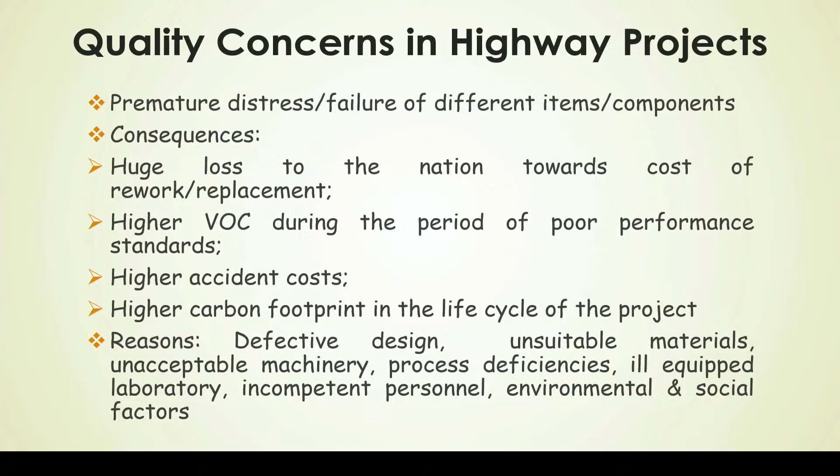So I will delve into how this quality control came into being. First of all, it started with industrial production, then it transferred to all aspects of engineering, including civil engineering.

Before the second decade of the 20th century, quality control meant inspection of products and removal of defective ones. That was the basis. Then the first statistical process control was started by Dr. Shewhart in 1924.

His theory was based on two parameters: assignable cause and chance cause variation. Something you know but are still not doing about, that's assignable cause. If you are not removing those assignable causes, you can never have good quality. Chance cause variations will always remain in spite of your best efforts. He then developed different statistical tools to minimize those chance cause variations.

Next came the concept of total quality management by William Edwards Deming. In post-war Japan, he was a respected personality in the industry. He proved that it is improved quality that brings good returns to all those involved in the process, starting from the customer, manufacturers, its vendors, suppliers. Everybody benefits from good quality.

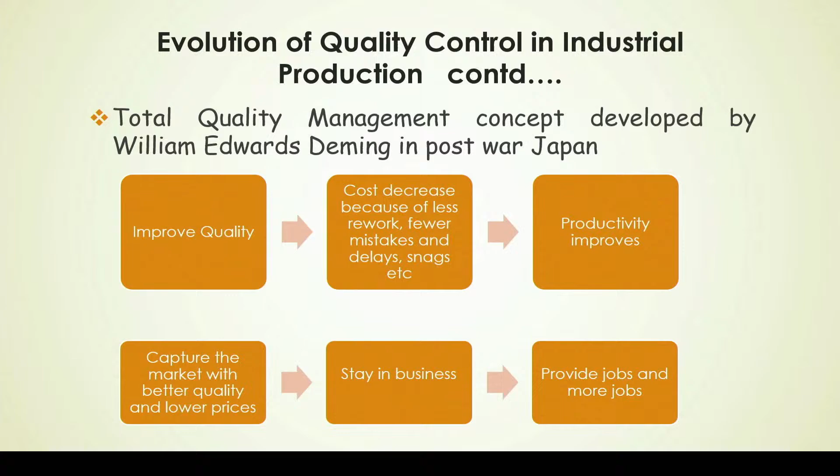It is a very misconceived, rather wicked notion that if you do poor quality work, you save money and get profited. It is the other way around. Good quality brings good returns to all, but in the long term, not immediately.

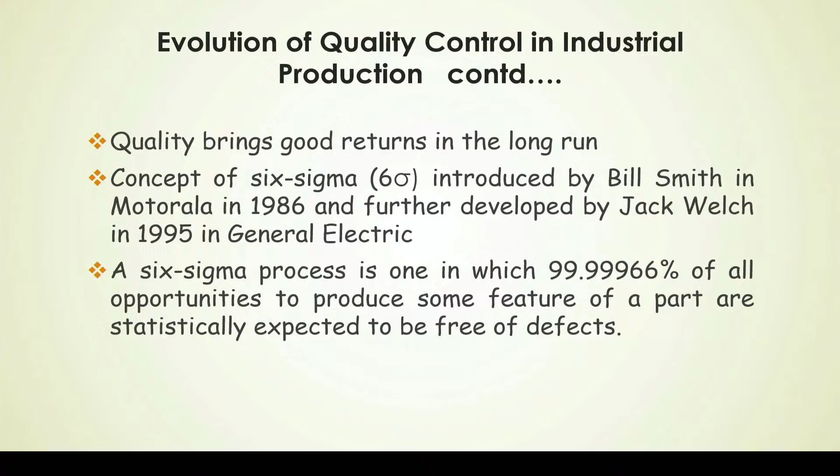Then came the concept of Six Sigma, which is the top of all, and we know that if there is 1 million products of something, only 3.4 are permitted to be defective, not more than that. So these are the benchmarks of quality, and we must see where we stand.

During my interaction with many people, even those in the business of quality control at site, I find they lack fundamental understanding of quality related terms. What does quality assurance mean? What does quality control mean? Many of us always confuse between the two.

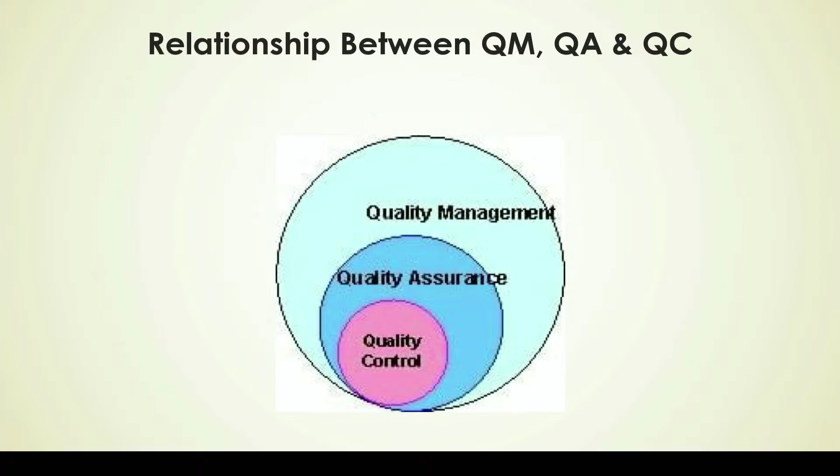So these are the fundamental definitions from ISO 8402, which gives the terminology for all quality related terms. Quality assurance and quality control are fundamentally different. In fact, quality control is a subset of quality assurance, which includes all your planning and actual implementation. If you can see this diagram, this shows how quality management, quality assurance, and quality control stand in relation to each other.

Then there are quality characteristics. Basically all the material, layer, or component we use each have several quality characteristics, like liquid limit or PI value. These quality characteristics define the performance based on functionality, reliability, usability, efficiency, maintainability, and portability. Based on these parameters, the quality characteristics are decided, and the values assigned to them are specification limits.

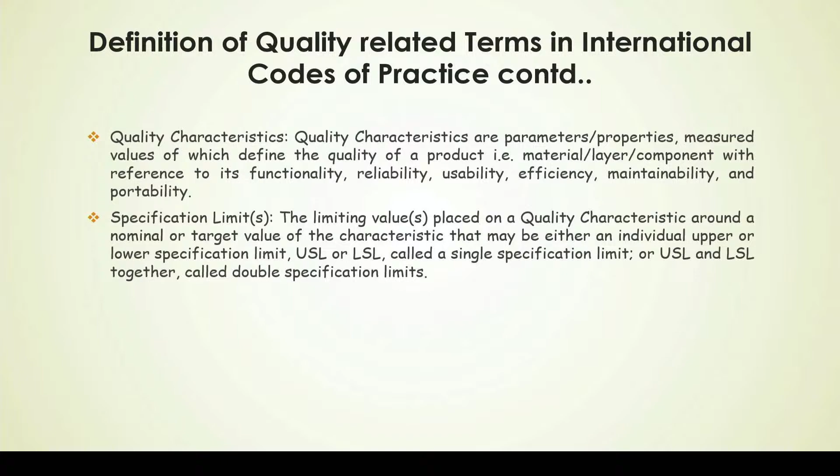So if I say I require 98% modified Proctor density, that is a specification limit for the field density quality characteristic. I think many times our field engineers lack understanding of these terms, so how can they use them properly.

Now I have a long presentation, I will not go into details. These are as per our IRC SP 112, which is the manual for quality assurance and quality control in road and bridge works. We basically have three stages.

We first have to plan things under assurance, then control it, and based on the test results, we have to either accept it or reject it.

I will not go into detail, but for having good quality, we require good and competent personnel. We have to have a quality assurance plan prepared in advance. This is a requirement of all EPC, BOT, and HAM projects. Within 90 days of the appointed date, the quality assurance plan is required to be prepared by the contractor and approved by the authority engineer or independent engineer.

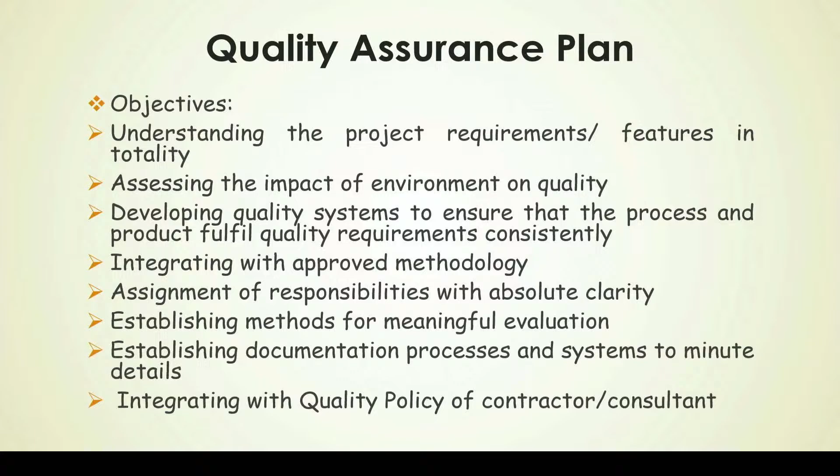But what we often see is that the quality assurance plan of project X is proposed for project Y, even sometimes the name and place are not replaced. That's the amount of importance we give to the quality assurance plan and its content.

I will not go into details again, but there are certain things our site laboratory is not equipped to test, like factory manufactured materials and products. How do we approve them? In IRC SP 112, we had an elaborate discussion on this, based on manufacturer's certificates, manufacturer's testing reports covering raw materials to finished products, coupled with witnessing in the manufacturer's laboratory, and if necessary, third party testing.

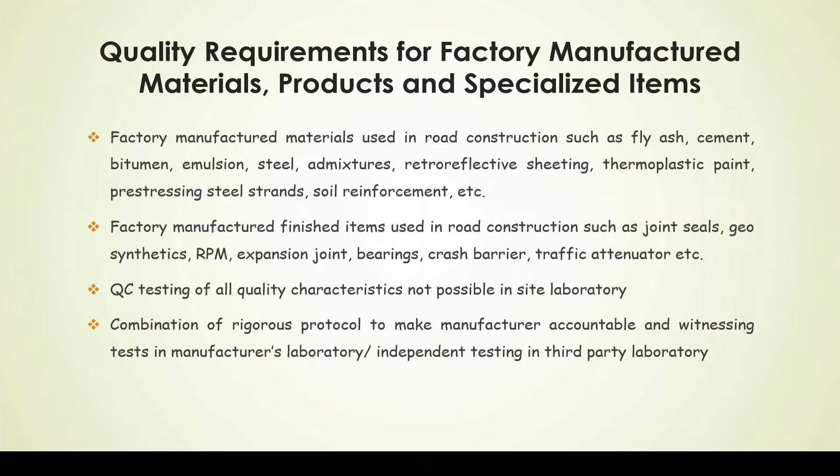So this is about laboratory and on-site testing and measurement. We all know it, but it depends. If there is a problem, then there is a laxity or closing our eyes for some of the things that I have mentioned here.

Then documentation and communication, this is also a very important part. There should be traceability. If an embankment has 10 layers, in the fifth layer, where from I have used the material, from which borrow area, and what was the property of soil from that borrow area - that should be available at any point of time.

We many times see field density determination with respect to MDD of certain soil which has not been used in the first place. So the entire testing is very ridiculous. It has no sense, but people do that.

Then come to statistical analysis, because statistical analysis is important. Why? We are not testing the population or the lot, we are testing the sample. Based on the sample testing, we are predicting performance of the lot. And for that matter, statistical analysis is very important.

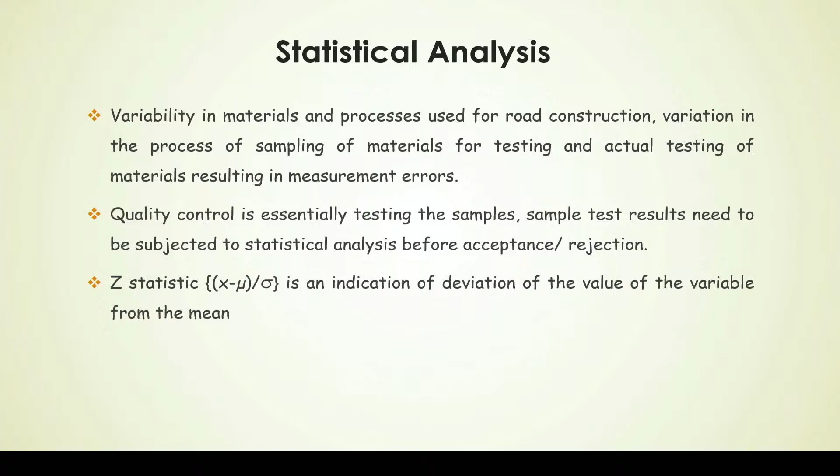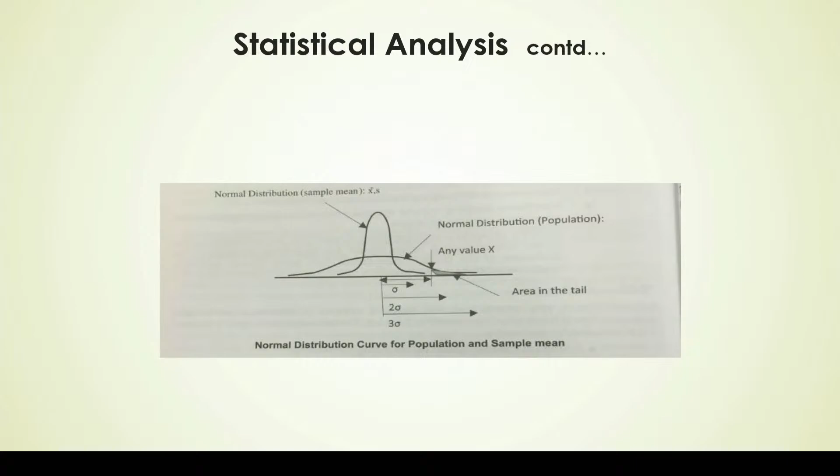This is a normal distribution curve showing the standard deviation for the sample and the population. This is the method, I'm not going into this. Again, I'll just come with a table. I think in our orange book, these are the items and the quality characteristics for which statistical analysis is mandated.

One should not approve a section based on the mean value only. Standard deviation has to be determined, and after applying the equation, then one should take the decision. But it is often ignored.

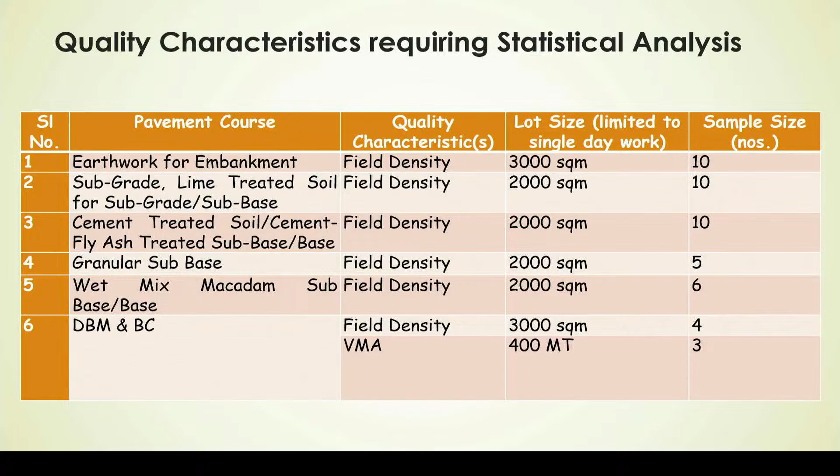And this is the final thing - how to accept, how to issue a non-conformance report. After non-conformance, it is not always to be rejected; opportunity should be given, and there are always ways and means of rectification. But is it happening with an approved methodology, and after rectification, are the test results satisfying? That's the important thing. So these are many lapses noticed in our highway projects.

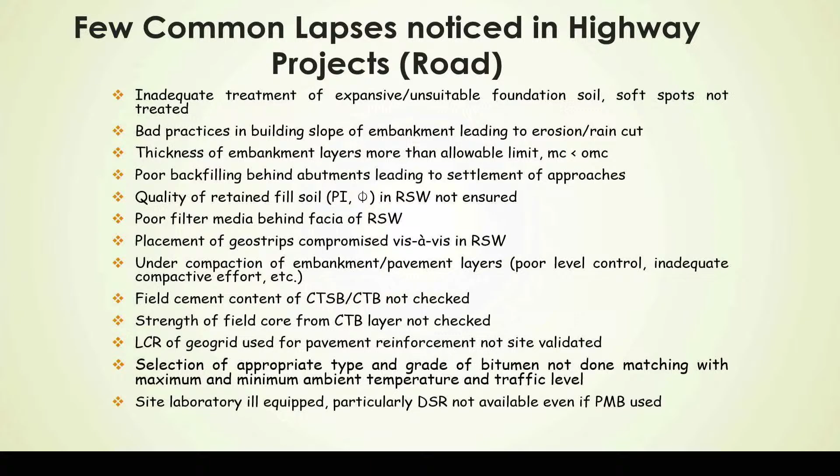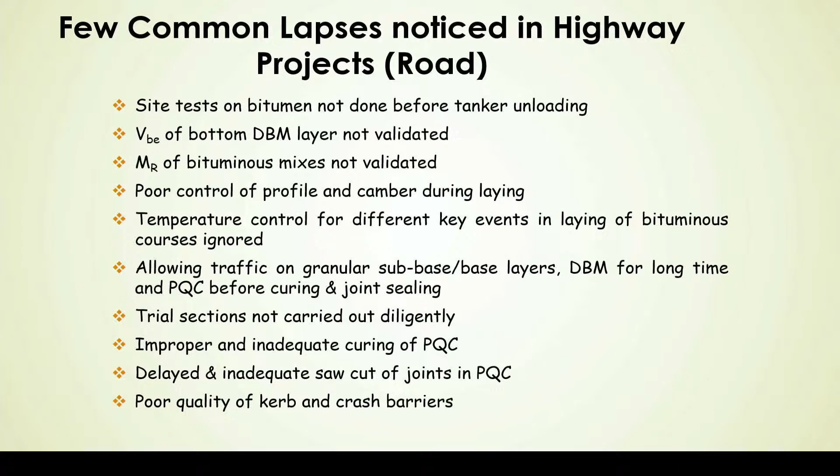Again, I will not be reading all of them. They are not only in pavement, they are in bridges, they are in tunnels. In many things we are noticing issues, in rigid pavement, under construction bridges. There are some glaring examples of how the lack of quality is affecting us.

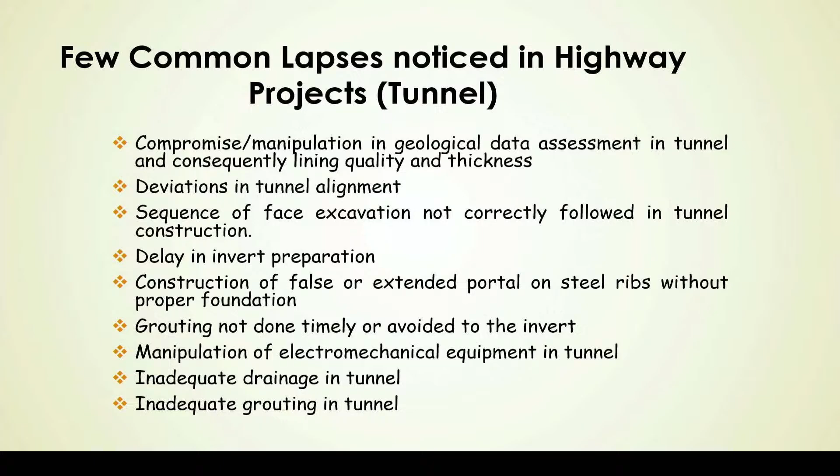Even for tunnels, manipulation of the geological data is one of the fundamental reasons. If it is a certain rock class, it is reported as something else, and that leads to some saving in the cost of lining or something, but affects the performance, the durability, and also sometimes results in under-construction failures.

So why are these lapses occurring? Because you don't have the requisite personnel. Then we are not insisting on deployment of qualified personnel from the manufacturer or expert service provider for operations like pre-stressing, expansion joint fixing, geosynthetics application, where the contractor's personnel are not capable or qualified for this. But just to save cost, they don't allow the manufacturers, or the manufacturer does not insist upon that.

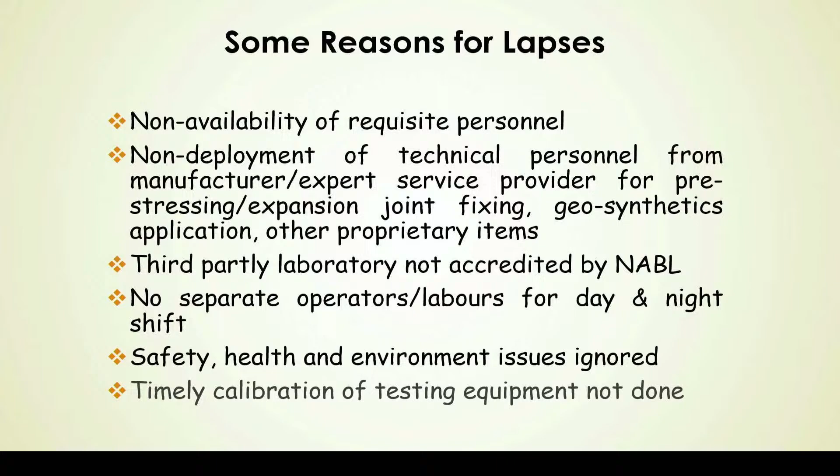Then third party laboratory not accredited by NABL, no separate operators for day and night - same person allowed to work continuously for 2 shifts - that will definitely affect quality. The safety, health, and environment issues always impact quality if we ignore this in a variety of ways. And then calibration of testing equipment not done timely.

So now these are my points for the panelists. We have seen that we have enough tools in our contracts to punish the contractor for wrong work. Probably we are failing somewhere. So can we have some ecosystem to incentivize the contractor for good quality? It is a thought I am bringing, and our panelists will give some insight into this.

Then capacity building of all stakeholders - I should say integrity is a lesser culprit than incompetency. So how to improve that? One should know what he is doing and what are its repercussions. Stricter enforcement, of course, but how to do it? The contracting mode, longer DLP - what should we have - then due consideration for safety, health, environment, and community engagement.

So I would request panelists to dwell upon these issues. We have a total time limit of 1.5 hours, so I would request individual panelists to please restrict their presentation or views to a maximum of 7 to 8 minutes. So I would first request Shri VK Rajawat ji, Member Technical NHAI, to please give his views.

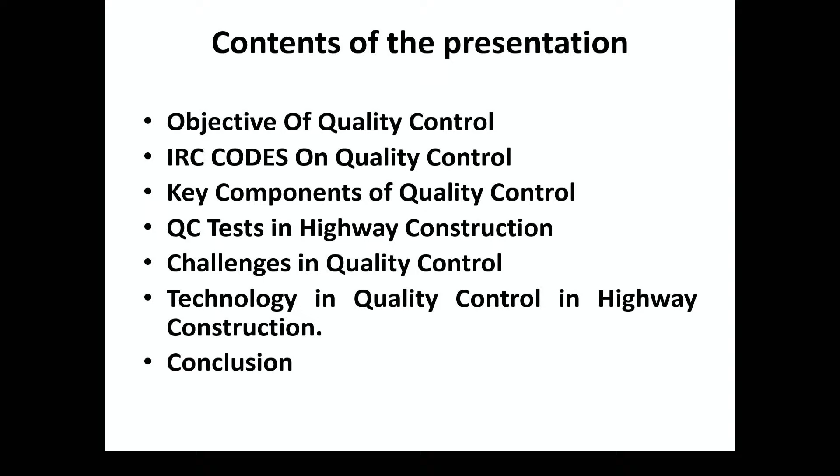As we all know, I think the context has already been set. Chairman has deliberated on all the aspects of quality in his introductory presentation. So it is basically to ensure that the highway construction meets the specified standards and performs as expected. That is the basic purpose. It is crucial for durability, safety, and cost effectiveness, as well as public satisfaction - to ensure the safety and longevity of the highway. We also have to reduce the repair cost and maintenance frequency, and enhance public confidence and road user satisfaction. That is the main objective of this.

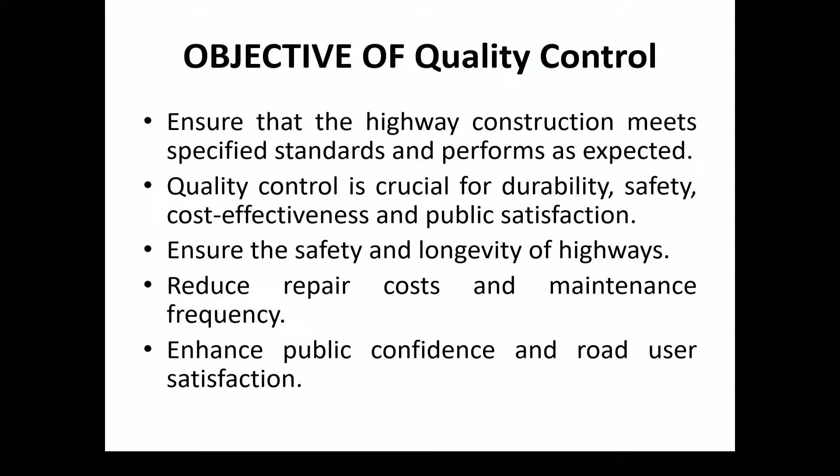At present, initially the only document available to the profession was IRC 11, and it was like a Bible for all of us - a 1984 publication, in use till 2017, for at least 33 years. This was the Bible for all quality control issues, the handbook of quality control for construction of roads and runways. Another important document is on quality system for roads, that is IRC 57, and another for bridges is IRC 47. So these were the three documents available to the profession.

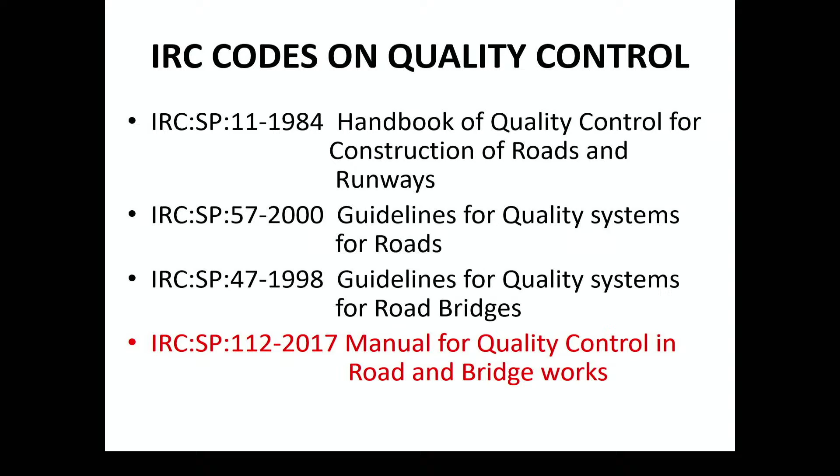Then around 2015, IRC decided that we should merge all three documents and have a single document, the manual for quality control in roads and bridges. So it will cover all the aspects - management of quality, quality assurance and quality control, all three issues. So this is the only document available now. All three documents have been withdrawn.

As we know, the key components of quality are material testing and verification, the most important component, including testing of soil, aggregate, bitumen, to ensure compliance with the specifications given in the manual.

Construction processes involve quality issues like proper compaction, asphalt laying, curing, every aspect. Equipment calibration is another aspect of quality, ensuring it is calibrated and functioning correctly.

Inspection and monitoring is also one of the components of quality. And documentation and reporting, keeping track of all the activities, accountability fixing and future references.

Various tests, very briefly: for soil and aggregate testing we have sieve analysis, Proctor compaction, Atterberg limit. For asphalt testing we have Marshall mix design, density and compaction. Concrete testing has slump test, compression test, and material sampling, which is random and scheduled sampling of materials.

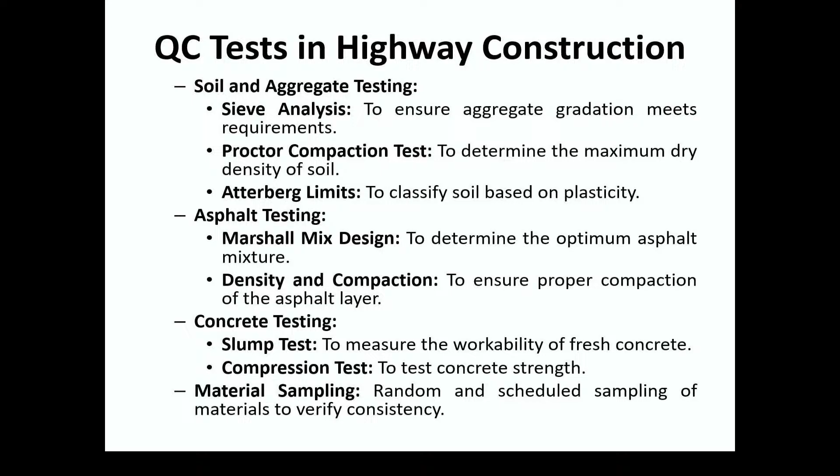Then we have different phases. First is the pre-construction phase, which includes soil test, material procurement, and equipment check.

Then the construction phase is the main phase where quality is most important, including on-site monitoring, compaction, concrete mixing, bitumen application, and visual inspection. Post-construction is when, before opening, we have to ensure it meets all the standards.

Long-term monitoring involves surveys and maintenance. Then performance evaluation through various tests, weather impacts, and all that.

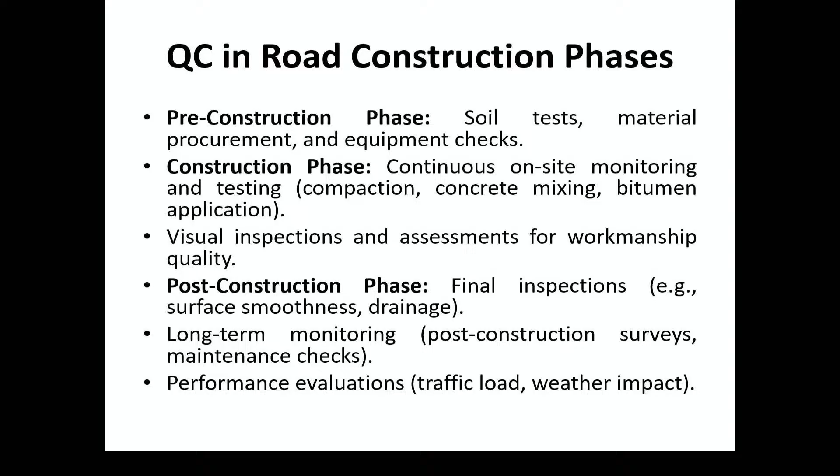Challenges include environmental factors like temperature variation affecting asphalt curing, and unpredictable weather conditions. Then human error, which we always see, is that skilled people are not available. That is another major challenge.

Material variability and logistics issues, there are delays in supply chains. So these are some of the challenges which I have highlighted.

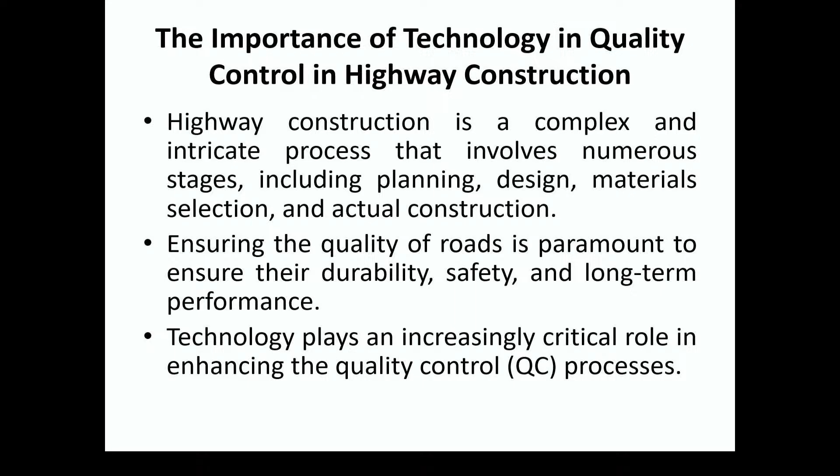Now I come to the main topic of my theme, which is technological development, and how it will address the quality issue. The quality of roads is paramount to ensure durability and safety, and technology plays a very critical role in how we can achieve this.

First is automated testing equipment. There should be equipment which is automated to reduce human error, so we should move towards this technology.

Drones and GIS mapping are used for aerial surveys, monitoring road quality, and assessing construction progress.

Then software has also been developed for quality control, with programs to track quality data, generate reports, and analyze trends over time. These are automatically generated reports, so there is no chance of human error.

NDT plays a very important role, with techniques like ultrasonic testing and ground penetrating radar for detecting internal issues. There are a lot of other equipments also, but for brevity today I have not covered all of those.

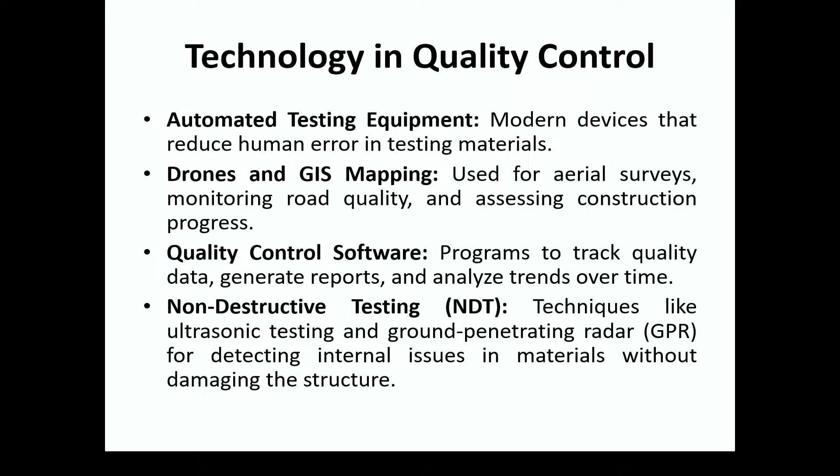Then real-time monitoring and data collection through the use of sensors, drones, and Internet of Things. Real-time monitoring of construction activities has become possible, and even compaction is being monitored.

NHAI has started monitoring some projects on a real-time basis, including compaction quality. These technologies allow continuous data collection on various parameters like temperature, humidity, compaction level, and layer thickness, and can be used immediately to detect deviation from quality standards, allowing rapid corrective actions to maintain quality.

Drones can monitor large construction sites to track progress and identify any issues with construction quality from a high-level perspective, such as improper material placement and drainage problems. So these can be monitored through drones.

We should use advanced equipment that has come into the market now, with machinery available that is highly precise and performant. GPS systems, automated leveling, and compaction control are integrated into quality equipment to allow more accurate placement of material, better compaction, and smoother finishes.

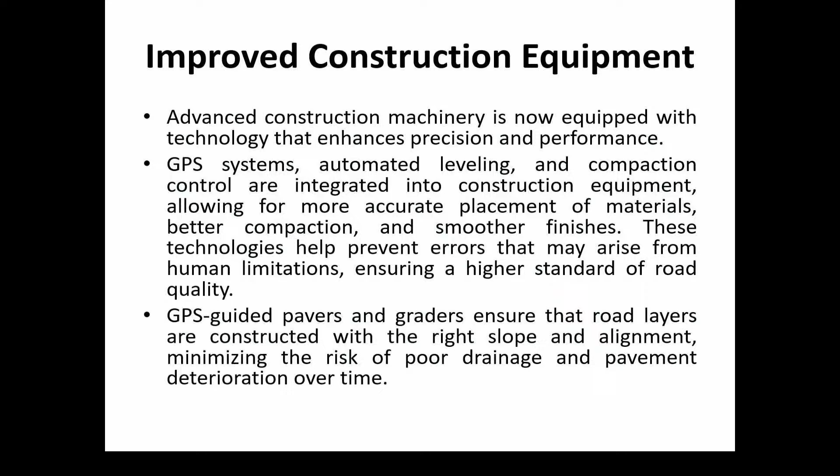This technology helps prevent errors that arise from human limitations, ensuring a high standard of road quality. GPS-guided pavers and graders ensure that road layers are constructed with the right slope and alignment, minimizing risk of poor drainage and pavement deterioration.

Advanced simulation and modeling software is also available now. Before actual construction begins, we can do simulation and modeling to see how we are designing and what construction methods to use.

Finite element analysis helps predict the performance of material under traffic load and environmental conditions. These simulations help engineers and designers identify potential weaknesses in the road design, such as areas prone to cracking or rutting, enabling them to make improvements.

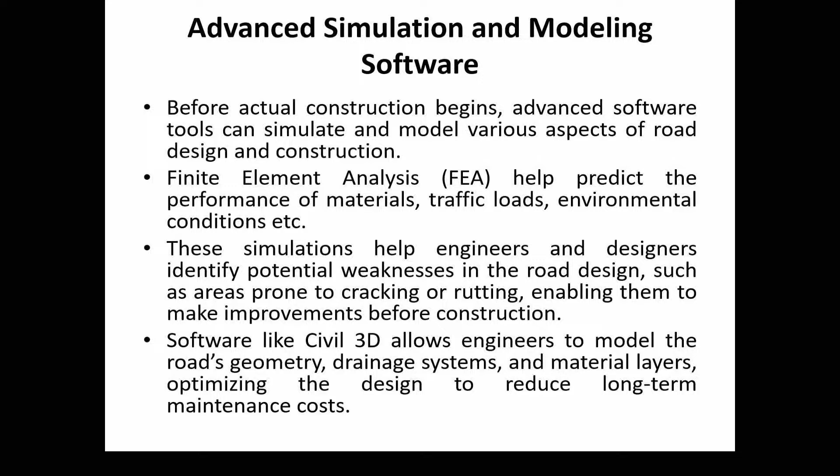Software like Civil 3D allows engineers to model the road's geometry, drainage systems, and material layers, optimizing the design to reduce long-term maintenance.

Robotics and automation are also available now, revolutionizing the quality control process. They can carry out routine quality checks and measurements, significantly reducing the risk of human error and increasing efficiency. Robotics can also be used for tasks like inspecting deep road layers or repairing pavement, ensuring quality standards are maintained even in difficult-to-reach areas.

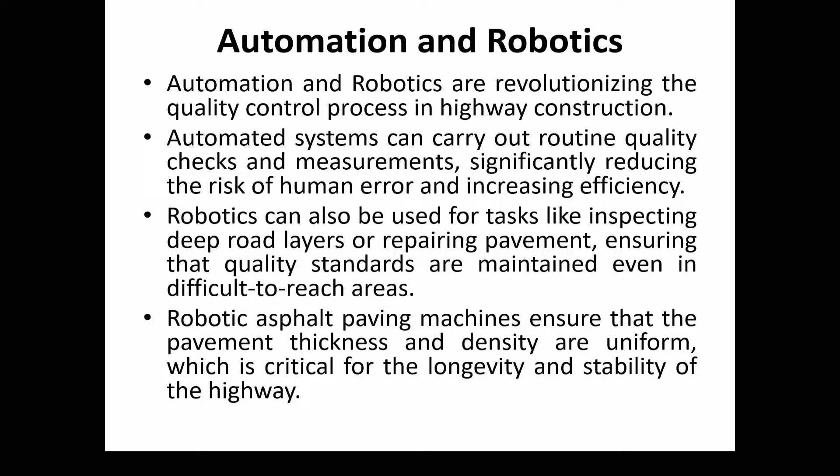Robotic asphalt paving machines ensure pavement thickness and density are totally uniform, which is very critical for longevity and stability. And the last element, also given by the chairman, is that communication and collaboration is also very important.

For that, cloud-based platforms and proper project management software are now available, which allow teams to track quality control parameters, share results in real-time, and ensure everyone is on the same page regarding standards. This transparency improves accountability and fosters a culture of continuous improvement.

Cloud-based tools like BIM, that is building information modeling, allow project participants to access and update the latest project data and ensure quality issues are addressed promptly.

These also help in cost saving and efficiency, automation, real-time monitoring, and predictive analysis. They reduce waste and optimize resources, leading to cost savings and more efficient use of time and materials. An automated compaction control system can reduce the need for retesting and rework.

In the end, I will say that integration of technology into quality control in highway road construction brings significant improvement, and leveraging innovation in material testing, real-time monitoring, and automated equipment can achieve higher quality roads with reduced cost and less risk.

Ultimately, the adoption of advanced technology will ensure inbuilt quality and roads that are safer, more durable, and able to stand the demand of modern traffic, benefiting both users and construction equipment in the long run.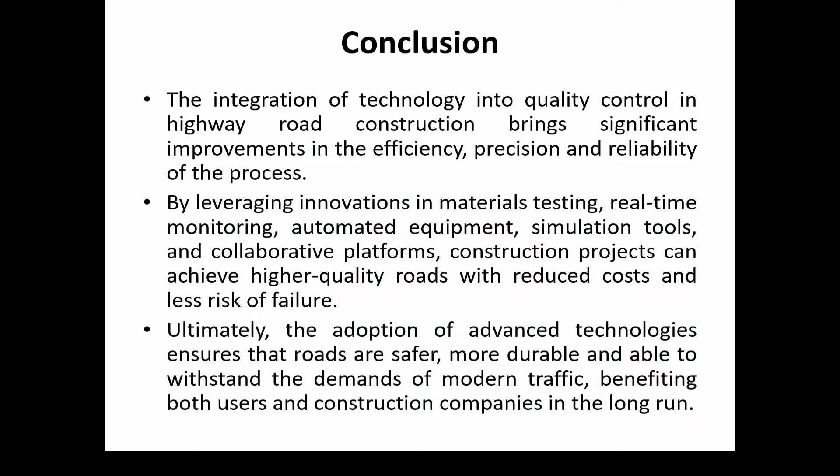Please limit to 7 to 8 minutes.

Good afternoon to respected DG Sahab and other dignitaries sitting on the dais. I will be very brief on the quality control aspect.

As you might be aware, NHAI is constructing about 5 to 6,000 kilometers of national highway every year, and major highway projects like expressways have been undertaken. Recently NHAI has received complaints about poor quality of construction in 2 or 3 major corridors, so NHAI is very much particular about the quality concern. I would like to raise some issues which NHAI is facing in our construction.

In the recent 1 year of construction, we found that many major highways witnessed heavy major rutting failures in flexible pavement, particularly in the stage pavement construction of one major highway, our Delhi-Mumbai corridor, which has a perpetual pavement. Recently we have witnessed heavy rutting in this, and that's why we are taking up repair work.

Another point we found in NHAI is major failure of rigid pavement constructed recently in two states, Madhya Pradesh and Chhattisgarh, where we found major failure within the DLP of 5 years. Whereas we construct rigid pavement for a design life of 30 years, pavements are failing within 1 year, 2 years, or even within the DLP period. This is a serious concern for NHAI and all other construction agencies to think about.

Recently, we have found that in some cases, the metal beam crash barrier installed at site is of poor specification. There is some gray area between the IRC specification and guidelines. We discussed this in the morning session with our DG sir, so we are improving upon it, but this is also a major area where we need to think a lot.

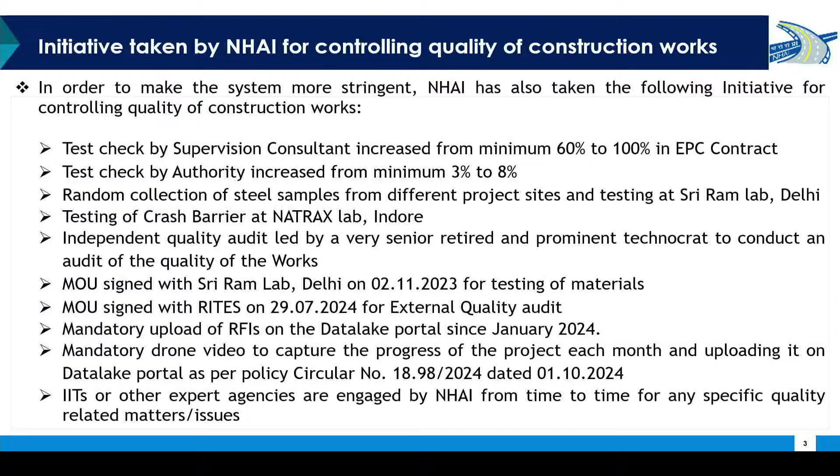IIT and other experts like CRRI and other IITs were also engaged for quality concern matters.

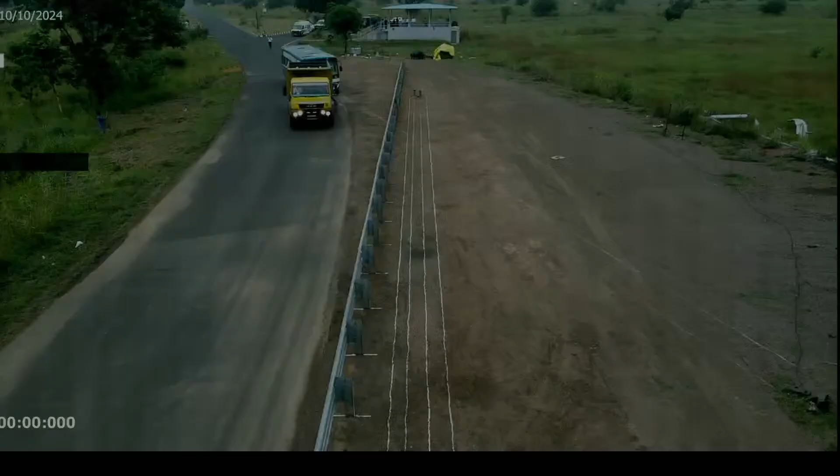Please have a look at the video. This was recently tested at the NATRAX lab. This is a case of failure of the crash barrier designed as per the ministry's specification, in which a bus crossed the crash barrier and jumped to the other side.

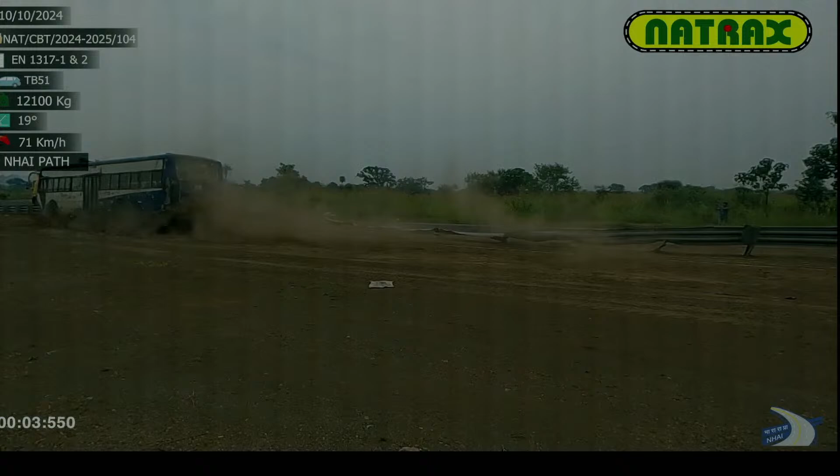We have tested two or three different samples of different height, different thickness, and different dimensions.

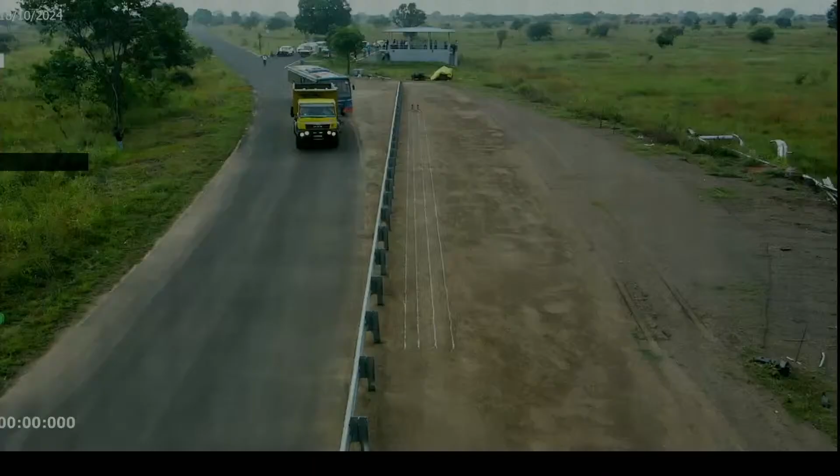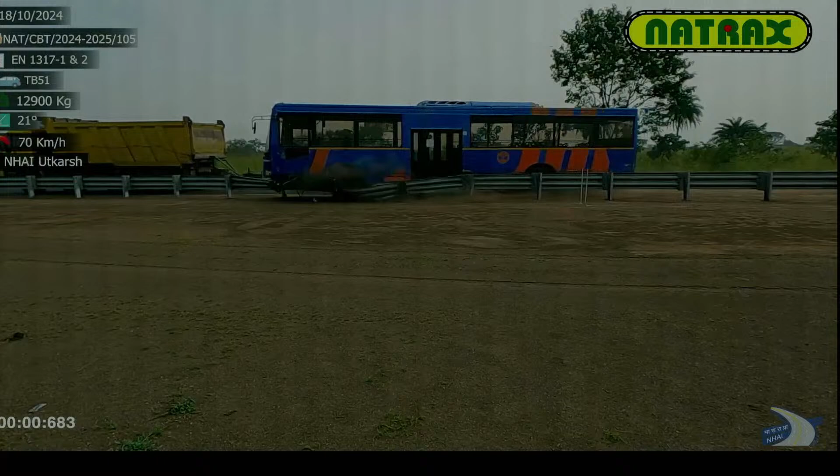This was all recently done at Indore in October.

Thank you, Sri Rajawat ji, for giving details of the initiatives taken by NHAI. In fact, NHAI is the largest road builder of the country, so definitely these initiatives will bring quality to the construction of national highways.

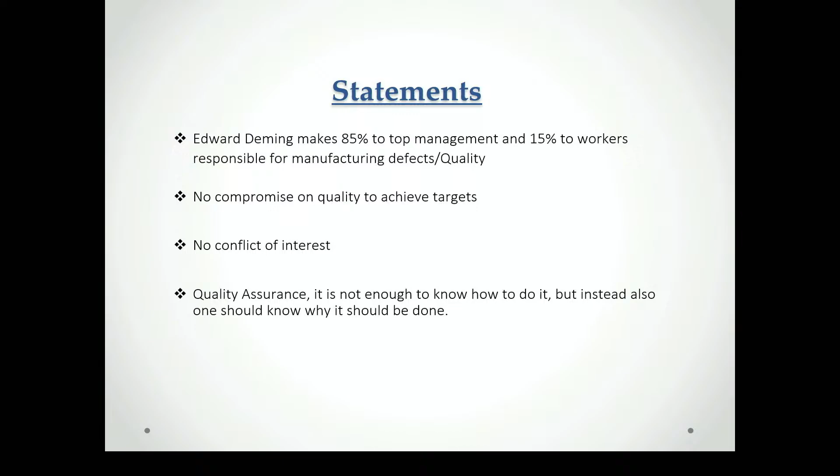Points of concern for me: quality assurance plan by concessionaires and vetting by authority engineer. How and when it will happen - you all know there is a process. Then the concept of zero defects from planning, designing, execution, and O&M. It is complete asset management. If you have a proper asset management program in hand, the person in charge of management, if he follows scrupulously on each and every field, automatically there will be a best product - zero defects will be there.

Quality is the ratio of performance against expectations - actual output against planned output. Why quality? You just see why we are failing here. What is our expectation? What is society's expectation? What is engineering expectation? 100%. Yes sir, so the essence of civil infrastructure is quality.

Think on those lines, friends. Strategies for the future at organization level: first, formation of national level committees to look into challenges faced by the construction industry. Right now it is not pertaining to literatures - already a lot of literatures are there. Systematic division of responsibilities among construction and quality team within the department itself.

Then third, training programs at all levels periodically - it is not at all happening. It is technical, we should update our knowledge regularly. It is not happening at all levels, from assistant junior engineer to chief engineer - not at all happening. It is all on an ad hoc basis. We don't have any proper program. Some programs are there, but not up to the mark.

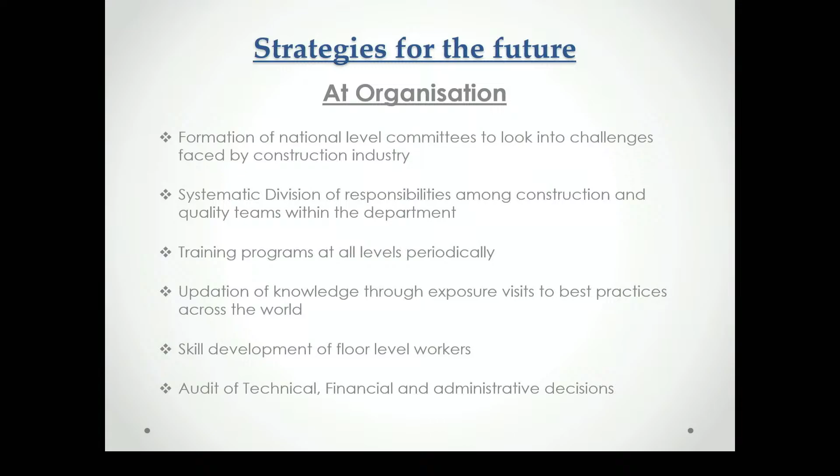So the last point, audit of technical, financial and administrative decisions - who is doing this? Nobody. Friends, at the field level, quality surveillance from inception to completion, including the O&M period - yes, it is already there, literatures are there, documents are there. That should be imparted to engineers as knowledge. It is not happening. Then timely inspections by engineers at all levels.

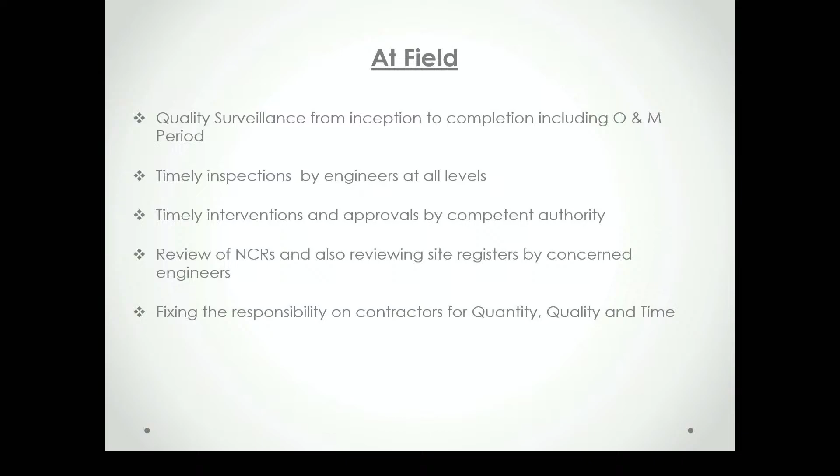Chief engineers, SEs, sir, are we doing justice? Then third, timely interventions and approvals by competent authority, review of NCRs and also reviewing site registers by concerned engineers. If this really happens, there really won't be any failures. Civil engineering is not only like industrial production - it should be continuously monitored, friends. So fixing the responsibility on contractors for quality, quantity and time - when we are paying them, make them 100% responsible.

Thank you, friends. Thank you for giving me the opportunity here. Really, we should think for the future. We are really builders of civilization. We are ready. Thank you.

I would request the remaining panelists to please focus on a few actionable points which, as a ministry, NHAI, NHIDCL, we can implement quickly, so that for the contractors and concessionaires as well, we can have a difference in the actual output. Now I would request Sri Kameswar Rao from Dilip Buildcon to please give his views.

Sir, please, 7 to 8 minutes. Yes sir. Good afternoon gentlemen, my name is Kameshwar Rao, I work with Dilip Buildcon Limited. I have been working on the contractor side for the last 24 years, on various projects, mainly on the contractor side only. So I thank the member panel for giving me the opportunity to speak about it.

So I'll start: whether contractors or concessionaire companies, anybody, if they mess up with a bad quality product, is it beneficial for anybody? It's definitely not - everybody knows it's definitely not. Companies go bankrupt, companies struggle, authorized persons sometimes end up behind bars - these are all problems happening due to quality issues. So the contractor and concessionaire are also struggling to ensure quality works due to lack of self responsibility of systems, delegations and decision power. Contractors need people empowered to take decisions, because something has to be done today for the sake of progress.

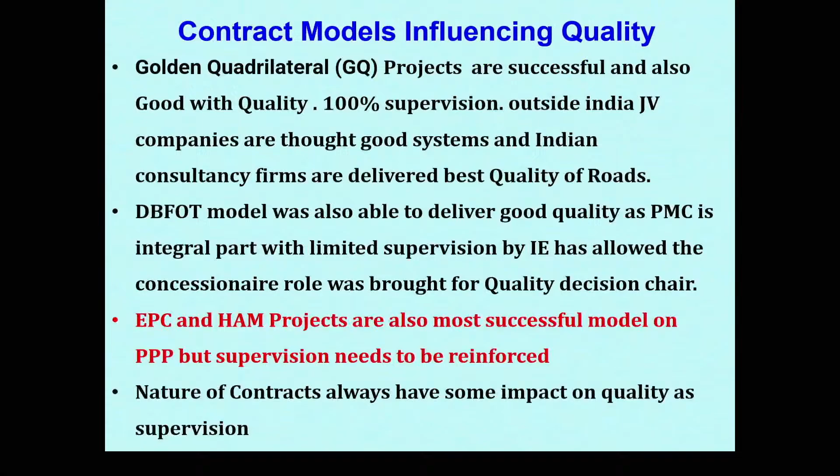So my next part is about the allied industry. We've been allied with so many people - bitumen manufacturers, steel manufacturers. Construction companies may come and go, but whom you can see consistently in the place is that allied industry, be it machinery manufacturers or raw material manufacturers.

Otherwise, if I talk about only making the road, it's 50% mitti and 50% gitti. Apart from this, if I use something else, it's only cement and all. It's been a great industry.

They are all very stagnant there, but how much are they contributing to this industry, how are we bringing them in as a technology partner? They have very little liability for defects, whereas the contractor who has signed an agreement has a long commitment and is always with the client. This is something we have to very seriously look at.

So let me talk about some machinery since I've been discussing machinery. We see the Wirtgen Pavers, so many people talking about them. Everybody thinks of the tie bar gaps in pavers. For Wirtgen Pavers, we have 25 of them. I'm a good customer of Wirtgen, but I'll tell you the problem: in the tie bar, if you don't insert it manually, it won't be inserted.

Why is it not automatic? Everything has been automated, but this hasn't been, and because of that you see the joints widening everywhere and water going inside. It's ruining the subgrade and the PQC panels are settling further. We call it defective, but there's the cost of labor too—one laborer has to be there on the paver, and PQC is always done at night when temperatures are subsiding.

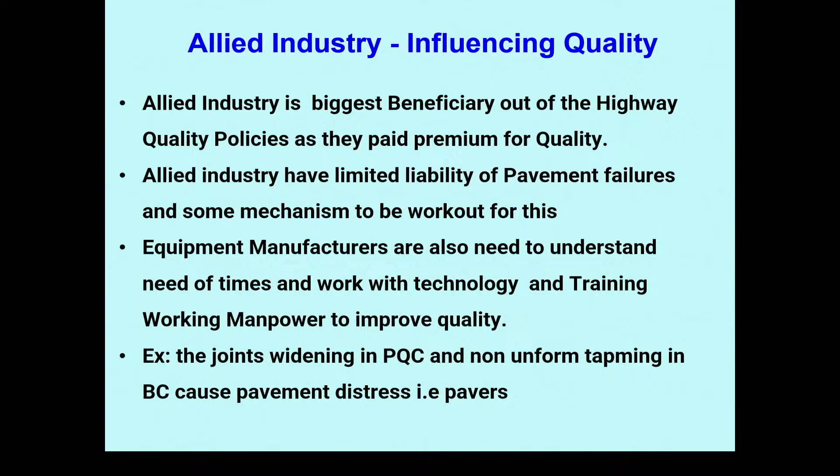So if I talk about the bituminous paver, there is segregation, there are many tamping issues. If you see the paver set, there are three back plates.

This is what influences quality—the major workforce is semi-skilled, which is what concessionaires have been using. 70% of workmen are non-engineers, less educated. If you look at the pyramid of the workforce, unfortunately at the bottom we don't have much skilling, even though we do upskilling of manpower at our company level. We build up our manpower, but attrition is the most effective problem in this digital era.

We have to think of something. I expect authorities to do something. So the quality of labor is also a problem, which is a major concern. Skill India—something like this—we have to tie up with the roads sector to develop the manpower.

There are some other problems also, I don't want to take so much time. There's mis-selling of products, technology, supplies, plants and equipment. There is monopoly in the brands, which obviously impacts contractor profitability—he has to bid as L1 for the tender but should be H1 in quality. It's the monopolistic brands that are earning the profit. That's what I want to convey here.

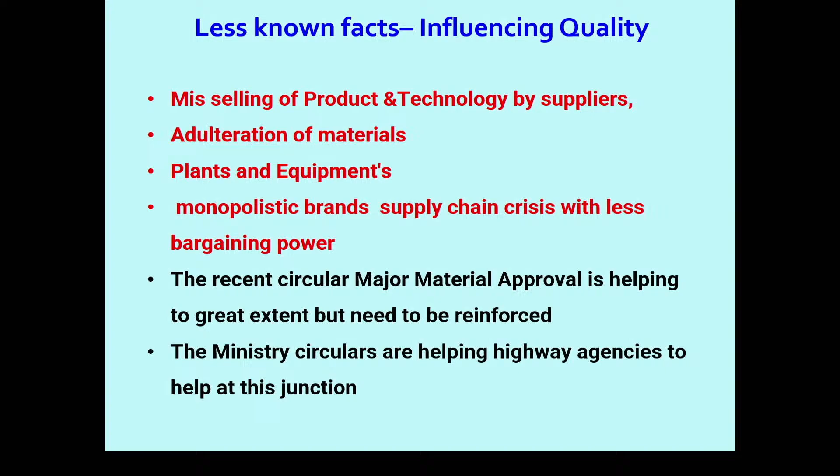All ministry circulars are helping agencies address this junction. Most major materials—very recently NHAI's initiative to reframe the work structure and standardize products was very helpful. NHAI's technology innovation has always been helping contractors. I hope this continues; we work a lot on the technology side to handle things.

I have one suggestion for the technical people here. We've been compacting soil layers to about 95%, so 5% is left over. This 5% compaction deficiency—if the embankment height is 5 meters, the 5% works out to 250 mm. When it gets consolidated, that 250 mm settles in the wheel path.

This is one parameter, so how can we address this—CBR and compaction are interrelated for the subgrade. This has to be related to pavement design; the resilient modulus by lightweight deflectometer could be correlated, and the great engineers here can address this issue. That's all my suggestion to the panel. Thank you very much, sir. Thank you.

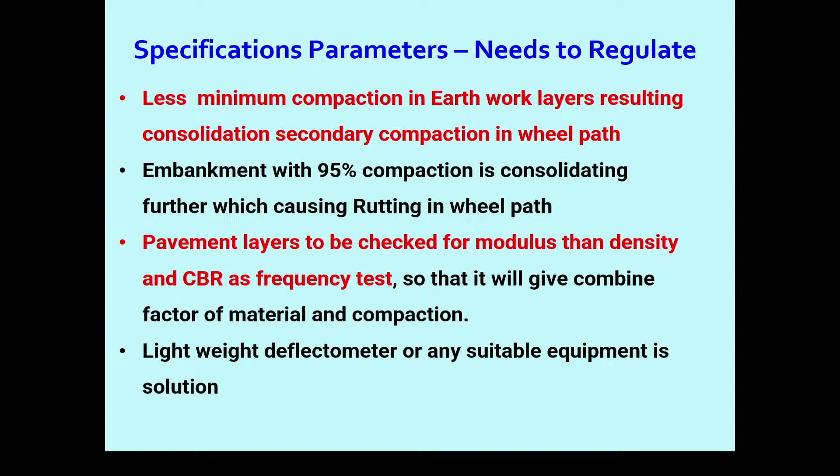Thank you, Mr. Rao, some very good points. I think the community of contractors, who are in fact the basic responsible persons to deliver quality, should also try to improve upon themselves. Nothing can always be enforced from outside.

Now I would request Professor Amarnath Reddy—let us have the inputs from the academic side, sir, 7 to 8 minutes.

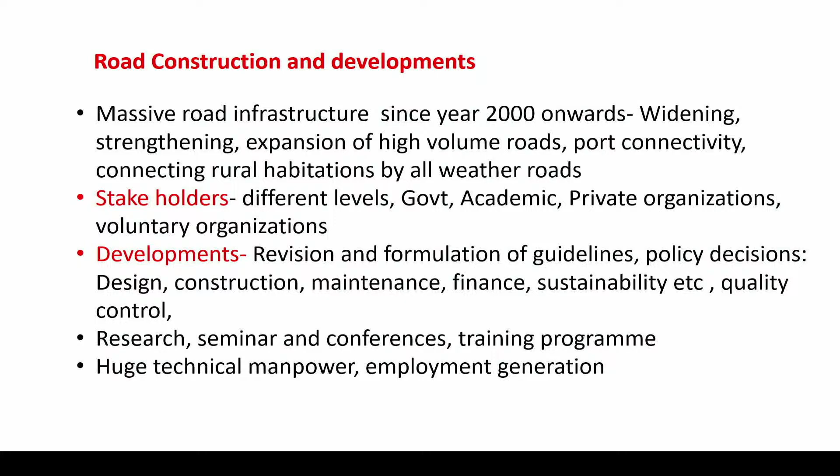So what are the challenges from my perspective on quality assurance and quality control? Of course, we have new materials coming in, and we're accepting that, no issues. But there are some challenges I wanted to mention about quality assurance and quality control, which is the main theme for today. I have my focus ideas on this - DG Saab told about a few points, but I'll be talking about strict enforcement. The other important thing is quality data collection, storage, and accessibility - this is very important, as we are not collecting the data properly, not storing it properly, and not using it. And finally, about the profession, about the civil engineering community.

New materials, yes, they are to be encouraged, but the only concern is they should be cost effective in nature. Because we don't have LCCA - life cycle cost analysis. If somebody says 30 years, 25 years, we cannot accept it just like that. But with careful selection, we can implement it, provided it's cost effective.

And later on, once we use it, there should be performance data collected. We don't require heavy equipment for this - we can simply assign this to local academic institutions along with local engineers, PWD, and start collecting simple data like roughness, rutting, cracking, this kind of things. And on either side you have a regular pavement, so we can compare that. This kind of mechanism should also be brought in.

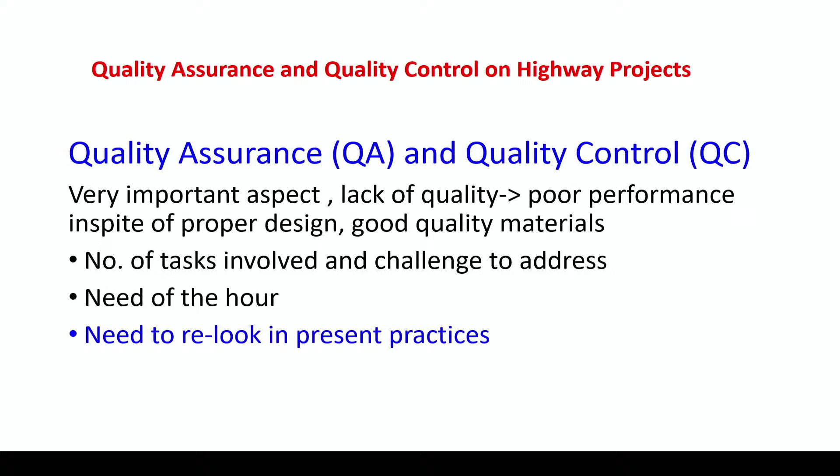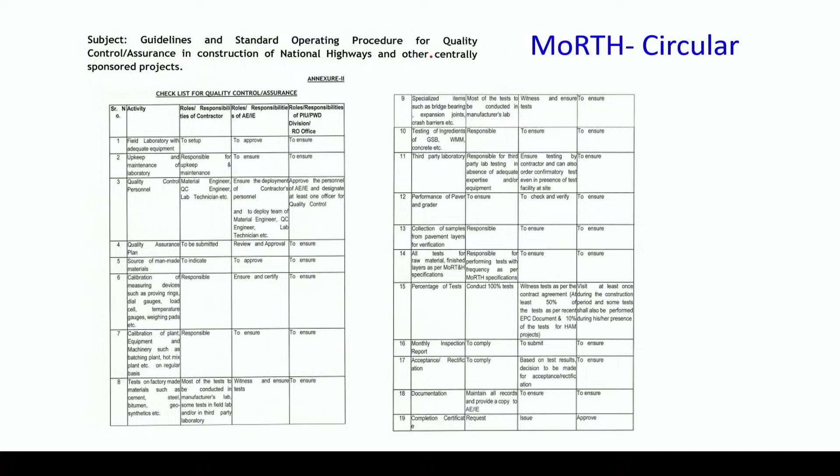The other topic is quality assurance. Poor quality already leads to a lot of issues. This is the need of the hour, and we need to look at this from a different angle. There are circulars available - we already know there are a lot of guidelines, and circulars are issued every now and then. Yes, it is helpful - now and then they caution about the quality to be imparted, so that works to some extent, but it may not always be adequate.

We have manuals - sorry, IRC SP 112 - we have manuals, everything is written, everything is documented. These are adequate. Even NRIDA has brought down guidelines as well. But what is required is a structured plan on quality assurance. Some countries, even when you select a quarry, there should be involvement from the highest body, like for a centrally funded project - they should be able to go and select the materials, sample them, and send them to different laboratories. This kind of facility is there elsewhere, but here such things are not in place.

For example, in the USA, AASHTO does this - when somebody comes out with a quarry, they go for sampling and send it to laboratories to get the work done. So that kind of quality assurance should also be there.

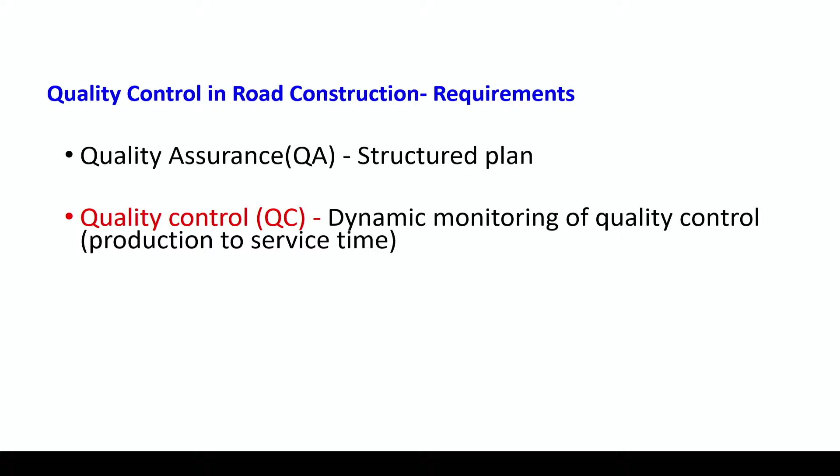And a very important thing, as my previous speakers also told, is that now we have all the documents - everything about frequency of testing, documents, laboratory testing - but finally these are not working, or they are working only up to a certain extent. So what is required is dynamic monitoring of quality control. This is the most important thing - unless we bring this, it is not possible.

In addition to the existing quality control measures, we should have dynamic quality control. Because once we test the aggregates separately - bitumen, soil, all these things - finally a mix is produced, and from there your real work starts. Mix production will be entirely different from your standalone aggregate gradation done in the laboratory. This is what goes to the field, so you should start collecting data from mix production, then transportation, placing, rolling, and even during service time.

This is very important - you have to monitor this dynamically, with the latest technology available. Today we have wireless sensor nodes, Internet of Things, data acquisition systems. A person can sit in the office - suppose NHAI wants to monitor from the head office - yes, they can monitor all the sites.

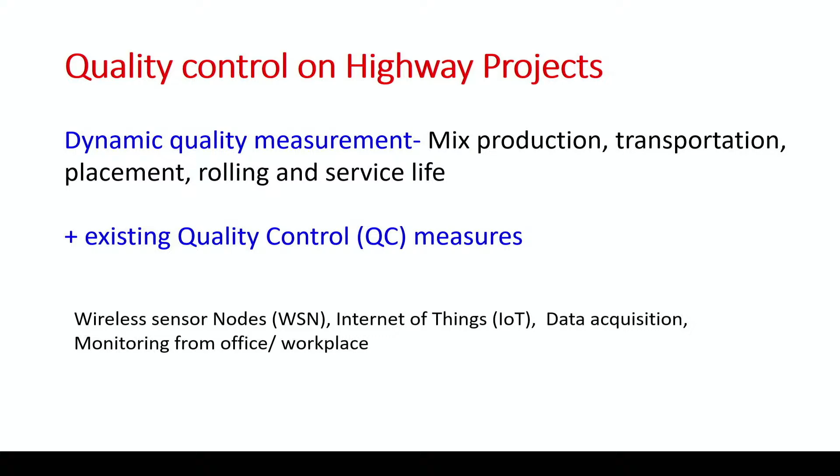These are all kept in this system. So these are some of the practices that the country requires. So when the mix is produced, what are the important parameters which are required? You have to capture those things.

That means minimization of human intervention, because once the quality of construction has improved a lot, we are limiting the human intervention. Earlier it was only manual construction, but now we have automated a lot of equipment, even from cleaning onwards. So here also we should limit human intervention. Of course there should be some, but sensors can be embedded.

Unless we go for this kind of technology, in addition to the regular practices, quality improvement will be difficult. There are sensors available now - some countries are doing this, but countries like ours need to go for this kind of thing.

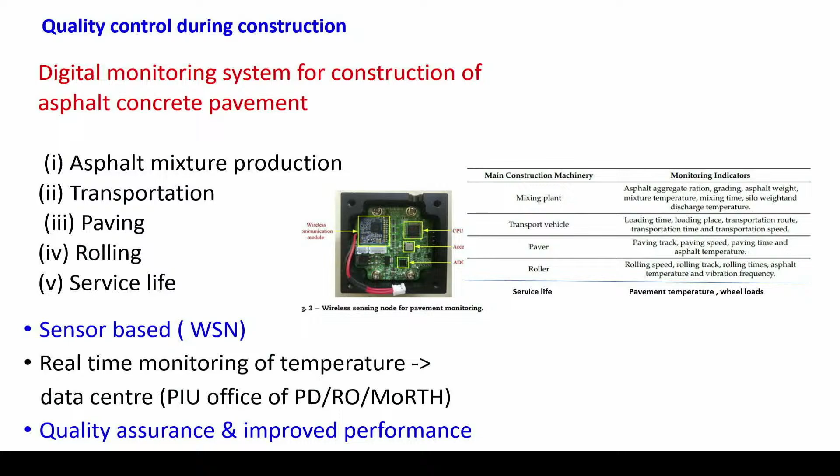Even in pavement service time we can embed sensors. For example, somebody says the load is very high on this road, but let us put some sensors, maybe strain gauges, and monitor them - we have a lot of advancement in this domain, but we are using these resources in a very limited way.

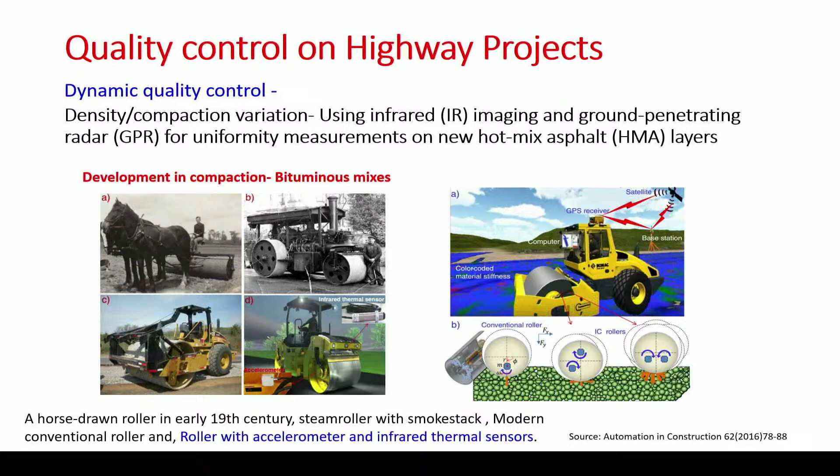Here you can see some pictures I took of how rolling was done earlier - later it was animal-drawn rollers, then followed by steam engines, then automatic compactors, but today we have intelligent compactors where data can be retrieved.

Once we do that, we also have technology available where we can use infrared and radar technologies to measure the density of the pavement. Once the roller moves, we can capture this kind of data and see how much density is achieved.

So if we embed this kind of technology in addition to what we are currently doing with the manual method of QA/QC, things will improve.

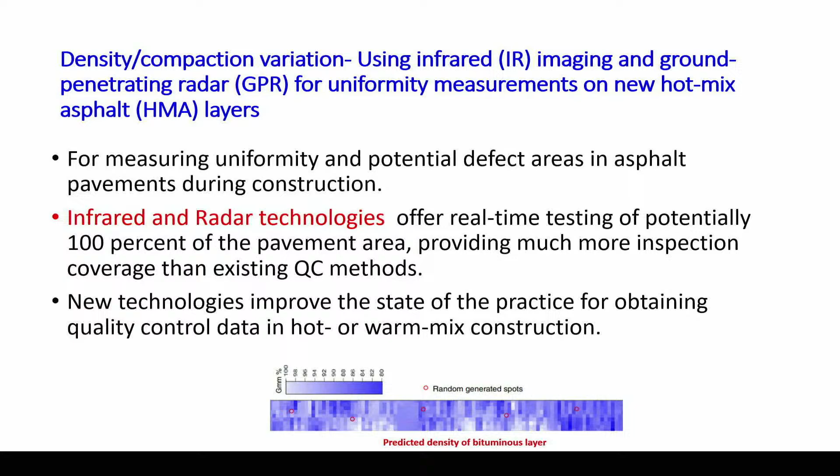The other very important thing is, once construction is done, we ask equipment like NSV to come in and certify things. Later on, every six months today, NSVs and FWDs are almost mandatory, where they have to do both structural and functional evaluation.

The problem is these FWDs and NSVs - we don't know whether they are calibrated, or when they were calibrated. Some of my previous speakers also mentioned that calibration of these devices is very essential. These are very useful equipment because the entire rehabilitation decision is based on this, so calibration awareness and requirements need to be enforced.

Finally, on the civil engineering profession - we need to create interest in the student community, involvement of students through summer internships, etc. Also when quality assurance and quality control activities are happening, please involve students from local engineering colleges, where they have fresh minds, so they can also contribute.

So finally, it is the integration of the civil engineering profession with electronics and computer science - these people can definitely contribute towards quality. My conclusion is: in addition to current practices in QA/QC through different circulars adopted by government agencies, which is a good initiative, new materials should be encouraged, but with caution.

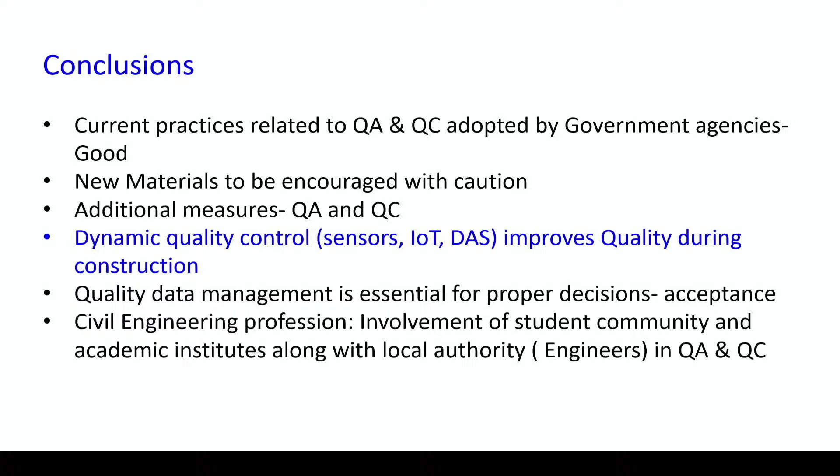Sir, 7 to 8 minutes please. Good afternoon to my fellow engineers and respected chairman here. To start with, I'm not generalizing the things regarding quality control. It will be straight to the point.

We carry out quality control tests for bridges, metro works, roads, buildings, harbor works, airports, etc. in Bangalore. We carry out dynamic pile load testing, static, integrity, crosshole, etc. related to pile testing, bridge load testing, material testing in India and abroad. The tests include plate load testing in ocean bed also.

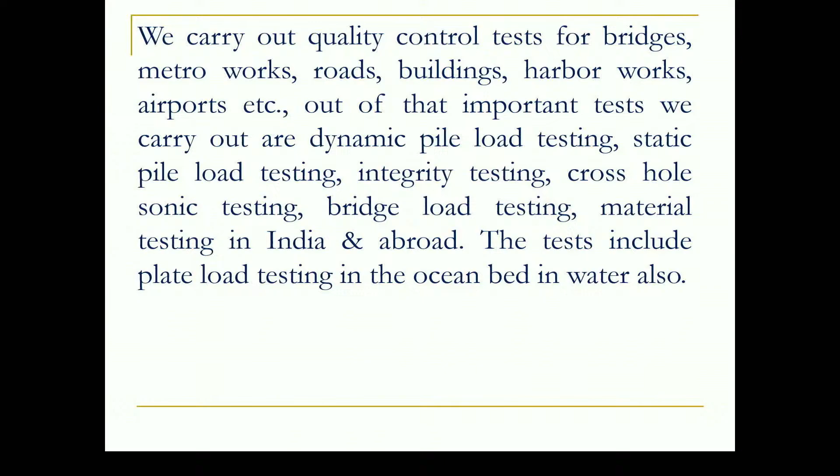Going further, the IRC has a manual for quality control for road and bridge works, IRC SP 112. This needs a revision at the earliest because it is almost 8 years old, and we have gone further and better in quality.

Further, the research and development in quality control test results of material shall be completely avoided. In the sense, when we give the results to the clients, they start doing research on that. They come back, they go back, come back. They do so much research that they destroy the results itself. This is what we have seen in recent years. Earlier, it was not there.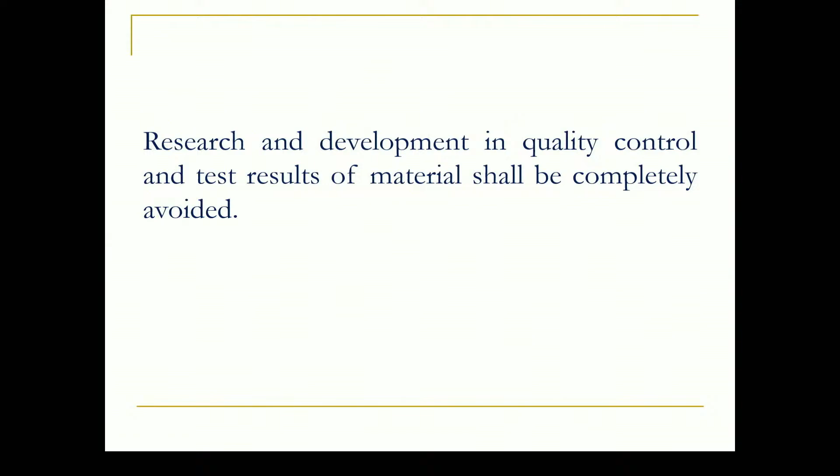That needs to be avoided, and there shall be mandatory orders to test all materials and structural elements from NABL accredited laboratories only, because now you have NABL accredited laboratories spread throughout the country, and NABL is always controlled by the Ministry of Science and Technology. There is tough regulation on them - they cannot go out of their way. So we need some orders so that it becomes mandatory for testing materials.

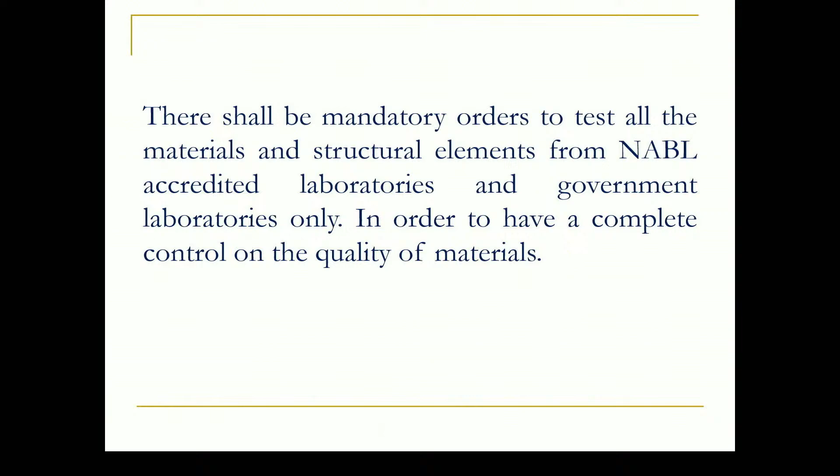The testing numbers with respect to quantities of materials, which we have been doing for the last 10-15 years, is perfectly in order. There is no need for revision of the quantum of tests against the quantity of materials. The MoRTH is absolutely perfect in that.

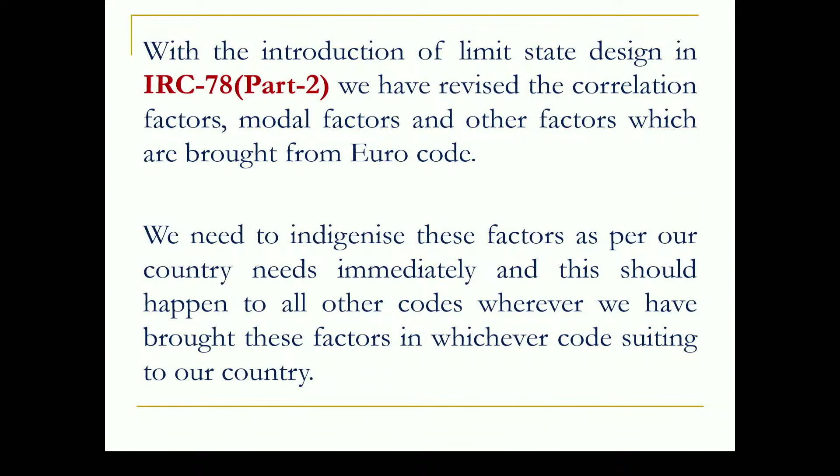With the introduction of limit state design in IRC 78 Part 2, we have revised the correlation factors, modal factors, and other factors brought from Eurocode. Sir, we have brought these from Eurocode and revised the 78, but we have not produced anything for India, for our own country. Now we need to indigenize these factors. We'll have to put somebody on this, because we'll have to collect a lot of data throughout the country and revise 78 so that it is fit for our country.

Then, guidelines for load testing of bridges done as per IRC SP 51-2015 - even if now, it is in absolute order. Revision, even if you think of it, is not possible. It is in fantastic shape, almost 10 years old, and we are still doing it. This code is much better than the railway code, actually, for load testing.

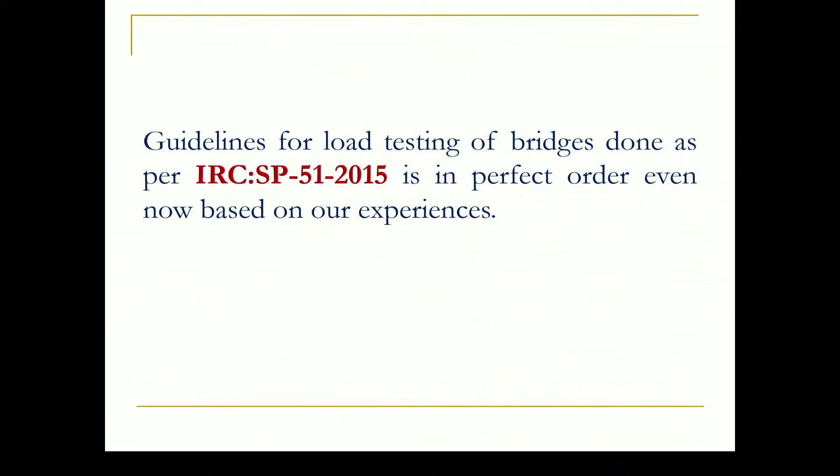There are some quality control issues when IRC IS 516 Part 5 Section 1, 2018 is used in investigation and rehabilitation of bridges, because they have related quality grading with respect to strength of concrete, which is incorrect - strength of concrete is totally independent of quality grading. Somehow the IS people have just correlated this, and it is not working. Basically, if we try to do this, rehabilitation becomes totally impossible for our bridges. So this point needs revision, and we need to take it up with BIS.

And going further, nowadays testing equipment, especially connected to pile load testing - we use Bluetooth technology. When we use Bluetooth, there is no need to put wires to your data taker. You can straight away connect it to the internet, and it will go straight to your client also. Your client will start looking at the test results there itself. There is no need to fear that, oh, they are doing some mischief at the site. So this type of Bluetooth technology needs to be introduced everywhere.

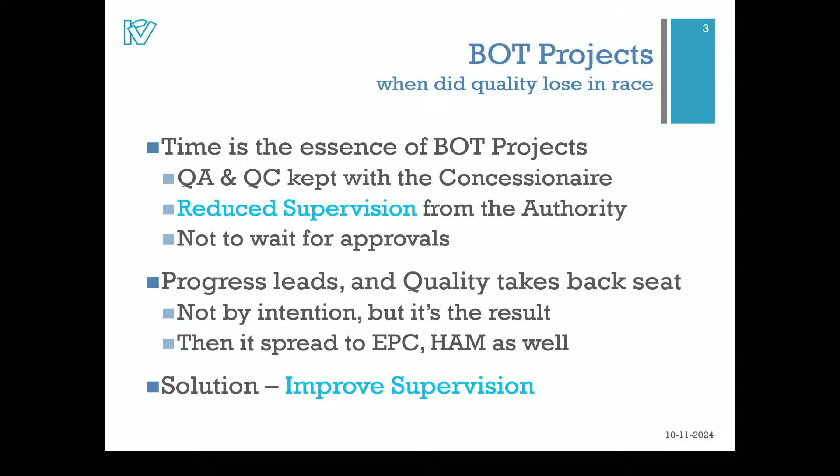Now, how did this happen? Earlier, when we were doing item rate contracts with 100% supervision, this was not a problem. But afterwards, when we reduced supervision and stated that you don't have to wait for approvals, the problem started. So now the solution is we have to improve the supervision. And how do we improve it? I don't say you should not complete the project on time; timely completion is the essence of any contract. But currently the focus is on speed of construction. Maybe we started at 2 kilometers per day, and today it's 36, 45 kilometers, something like that. It should shift to building quality roads.

An excellence award should be instituted for companies and individuals, not only department individuals, but also contractor individuals, for building the best quality roads.

We have that orange book, which is so detailed. We have detailed specifications, detailed construction procedures. Quality standards are very thorough, there is no mistake in that. Quality control procedures are also there in section 900. But even after that, why is there a problem?

Actually, our quality has deteriorated at the lowest level. Let us accept it, working at the lowest level, I understand. If the roads are not failing, there is no issue. But if they are failing, then it is only due to the lowest staff.

I'm not talking about the commitment, which of course somebody said is 85% due to the commitment of the top management. Yes, it must be there. Quality and speed must go together. But if it cannot go together for any reason, we cannot increase the risk. Quality should be first and speed next.

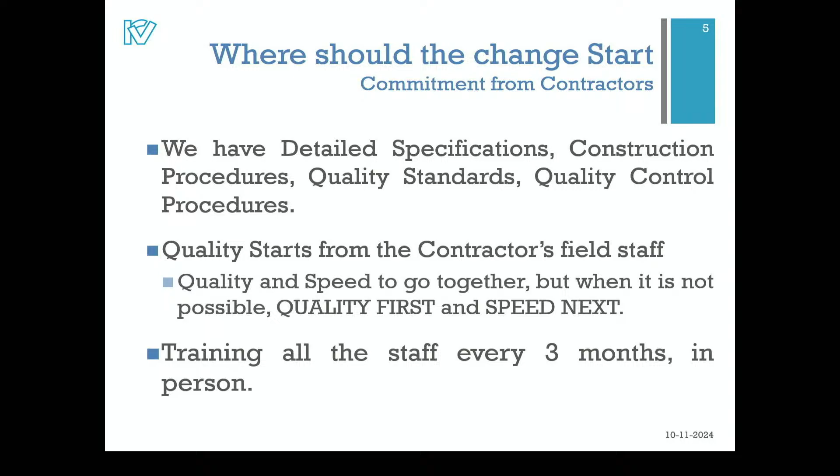Some factors responsible for producing poor quality are poor structuring of the supervision contracts, less number of staff, and less number of vehicles. In the recent contract which I was about to sign, probably signing in November, on November 25th or 26th, there are 30 people and we were given 3 vehicles. And 30 people are all only at the top.

Then inadequate staff to man laboratories is a very, very big problem. They must man the laboratories, plants, paving and concrete operations. Laboratories should buzz with activity, plants should buzz with activity, people should be there. Similarly, for paving operations and concreting operations, a representative must be there.

I'm not talking about high level bridges or high level contracts, I'm talking about a normal contract. And there's a lack of focus on process control. We only go there to do a field density test and then probably levels - nowadays levels are also not being taken. We should be present throughout the entire process.

Then there's inadequate contractor staff in execution. We see that contractor staff are not there - too many projects going on everywhere and staff are not there. We are talking about skill - we want engineers there, we don't want others. We don't want labor supervising things, we want engineers to do quality control. Then compacting thick layers, and that too dry of OMC.

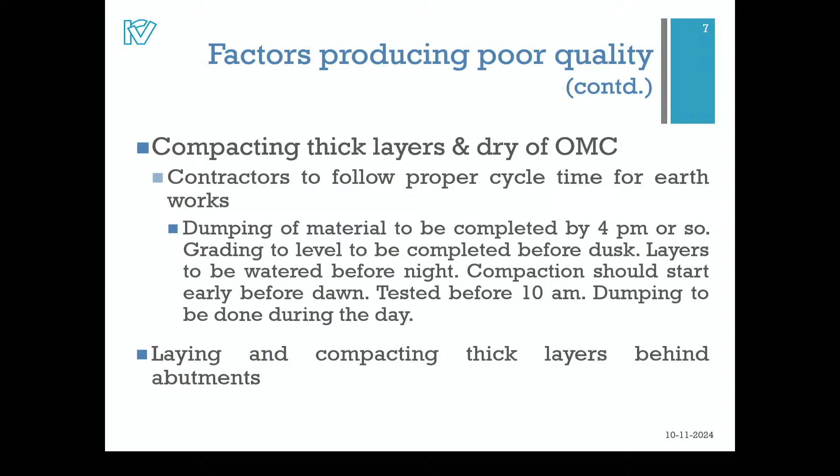Laying and compacting thick layers behind abutments is the sole reason for the menace - the settlement near the abutments. Concrete and the paving should be manned.

Now, RE walls - quality control is very, very easy. Why should this bulge? You have to maintain the batter. Only thing is, at each panel level, you have to go and measure the batter and see whether things are going on well on that side.

Then, fill material should be tested for phi and C, which is not being done. Once in the design time you do it, and after that sometime you do. But if you do it, then that also will be corrected.

Then, PQC in RE walls - RE wall approaches should be avoided. My able friend sitting over there, who is an expert in rigid pavement, once said that it should be a different material.

But when you put the rigid pavement in, the RE wall approaches will have joints and cracks, and the water will go inside, and the RE wall will bulge. And once it bulges, again panels will get settled. So it's actually having a reciprocal effect.

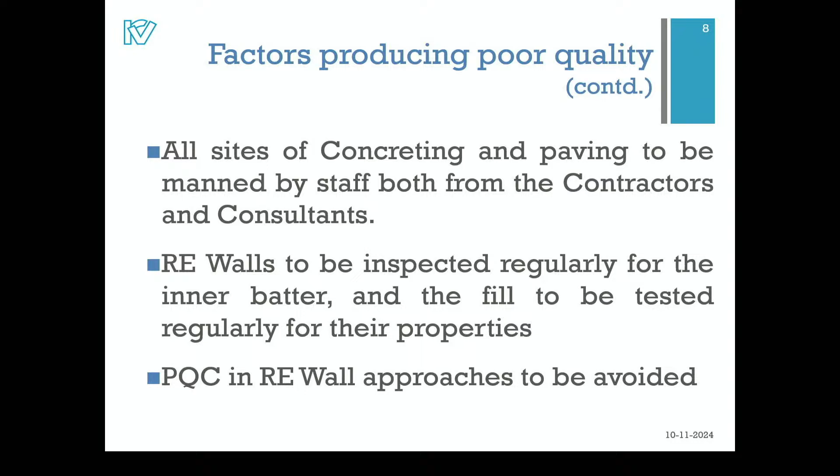PSC beams should be made ready just in time everywhere. After failures, we have actually conducted so many workshops. Even after all 4 workshops, I had to myself face erection of 84 girders which are bulged, which are hogged, and then they have cracks. So those were all 40 meter spans, and they were all set, and it was standing in front of me for approval. So we should prepare the girders, stress the girders just in time. The moment it is erected, brace them, then put the cross girders, and then do the casting. Otherwise, see, these are the cases which are resulting in failures.

Over optimization of designs in the face of value engineering should be avoided. And rigid pavement resting partly on scarified existing road is also settling.

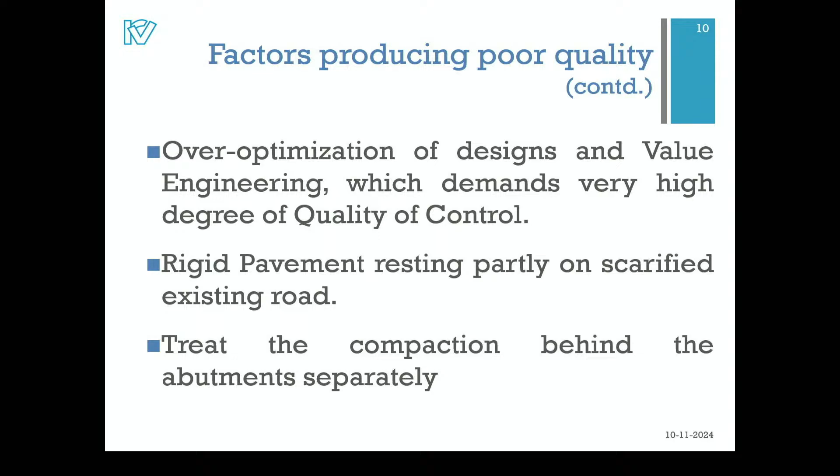The last point is to focus also on the small things. In one of the cases I have faced, a very big structure was built and there was a problem with a small wearing coat, there was a pothole, and it was highlighted in the media. And some boundary wall, which was supposed to be just a boundary wall, faced pressure from the road, and that has become a big problem. So similarly, there are various other things, kerbs, crash barriers, and all these things also should receive appropriate attention.

The last point which I wanted to tell is that I was traveling on 2 roads which were really very, very good. Their kerbs were excellent, their crash barriers were excellent. They were par excellence, more than world-class roads. But when I found out why exactly it was done this way, they were focusing on selling those roads since the beginning, and the prospective buyer was with them in doing all the quality control and bringing it to that level. The roads were built to that perfection.

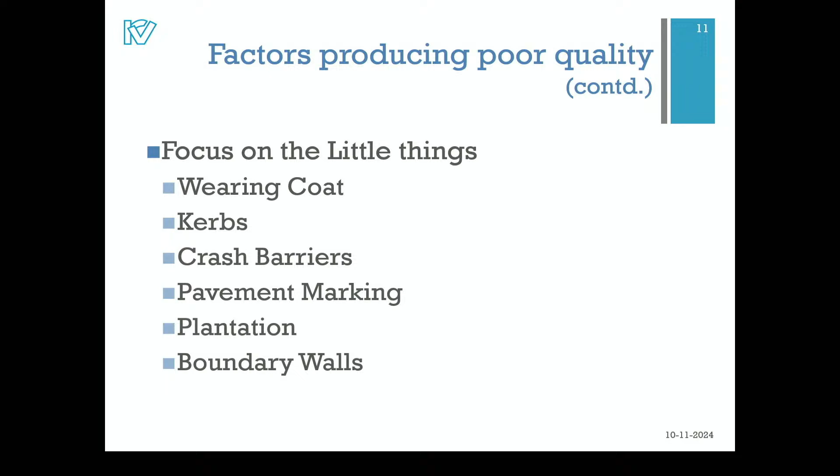Thank you all. I'm sorry, sir, if I have exceeded my time.